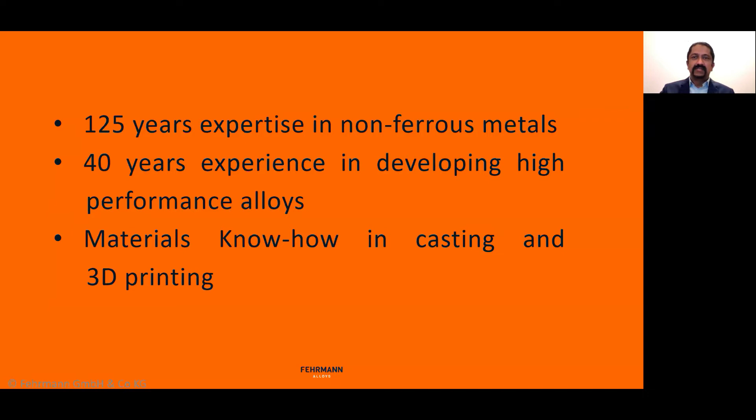So we have over 125 years expertise in non-ferrous metals, especially in aluminum, and over 40 years of experience in developing high performance alloys. Materials know-how is really our forte in casting, and we are venturing into 3D printing in the last few years. We think through this material innovation, through R&D, these will be the fundamentals for a key driver of change.

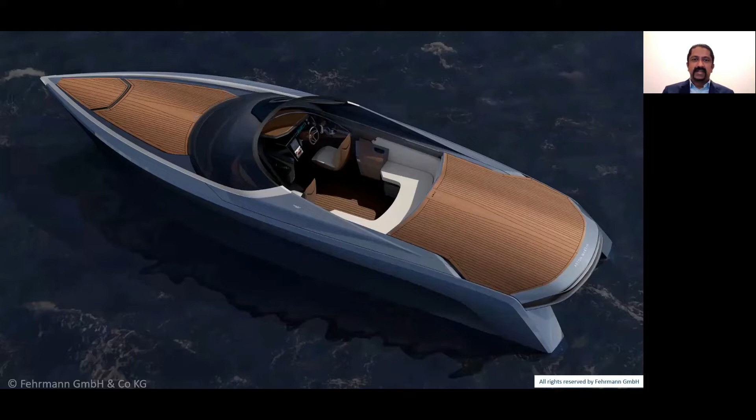For us, the building block of our products lies in our DNA, material composition and characterization. As you can see, traditionally we have been in the windows business for ships, and moving on also for building and construction. That's what we've also embarked on. And simulation techniques and technology are also coming into play to see how we can better innovate our traditional businesses in windows, where we had been very active.

We still are in mega yacht windows, ship windows, high performance ship windows, and also speedboat windows. And from there, through that knowledge in casting that we have built over generations, with over 40 years of experience in developing these high performance alloys, we have gone into looking for alloys that are also fit for both additive manufacturing and casting, safety parts. Customized development of aluminum for AM is one of our key areas that we've been looking at.

These core principles that our founding fathers had set for us in terms of innovation are at the center of our service, and we continue to strive for excellence through this. Our latest offering is really tagged as one design, one material, 1 to 1,000,000 parts. So that's what we intend to offer.

How are we doing this today? It's really thanks to some of our wonderful partners that we have in material science, additive manufacturing, and casting. We have a lot of great researchers working within the Hamburg metropole region, as well as the greater parts of Germany. We are also beginning collaboration with international research institutions to move up the value chain and to find new possibilities that will not only help us in our core business, but also help the greater industry as well.

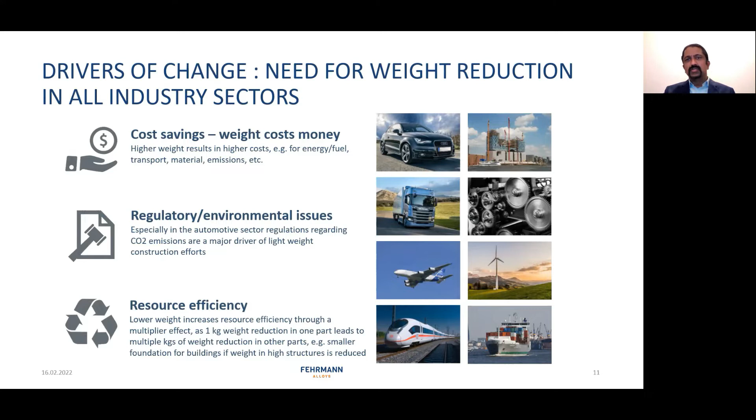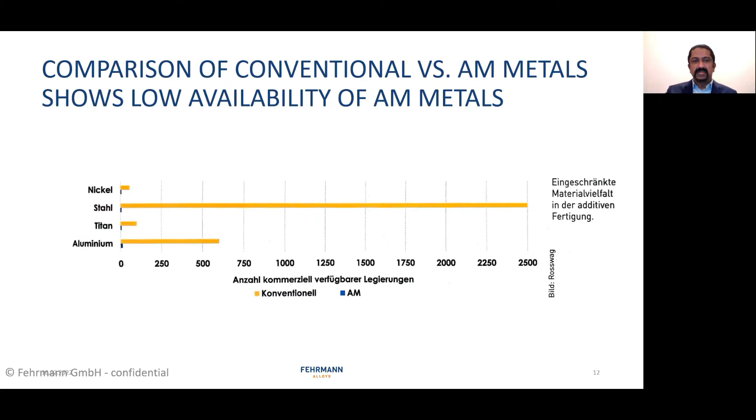Today we see there is still a lack of availability of metals for AM, and this is a niche space that we think could be very useful for us to go into, as we transform our traditional casting foundry. As you can see, nickel, titanium, and aluminium are much less available versus steel, for example, and that's an area we have been looking at.

To bring all of this together and develop high performance aluminum alloys really requires great know-how of the complete value chain. Materials are the key starting point in this: what are the alloy components, the concentrations, and the effects of the reciprocal effects as well. And how do you do the alloying?

What is the process? What is the melting process? Refining these materials to optimize them in a process chain, and then creating that alloy, which can then be atomized through different techniques, finding the right parameters, finding the right grain sizes and allocation, and characterizing the powder is very key as well.

And then eventually, what does it go into in terms of production? Is it LM, SLM, LMD? And then finding the right building parameters, the feed rate, the energy input, hatch distance, production, and per different additive manufacturing machines are really key to ensure you have a very solid alloy that you are producing.

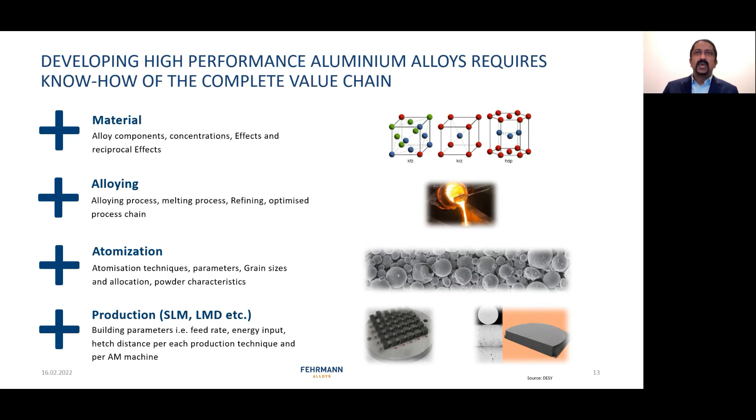Through this know-how, through this collaboration with our researchers, our in-house researchers as well as our partners, the first high-performance aluminum alloy, AlMgty 80, was launched in the autumn of 2019, making it really, for the first time, possible to produce any number of parts with one alloy through 4 different processes: 3D printing, sand casting, mold casting, and high-pressure die casting.

Following that successful launch, we introduced another silicon-free high-performance AlMgty alloy, which enables color to be added to 3D printed metal parts.

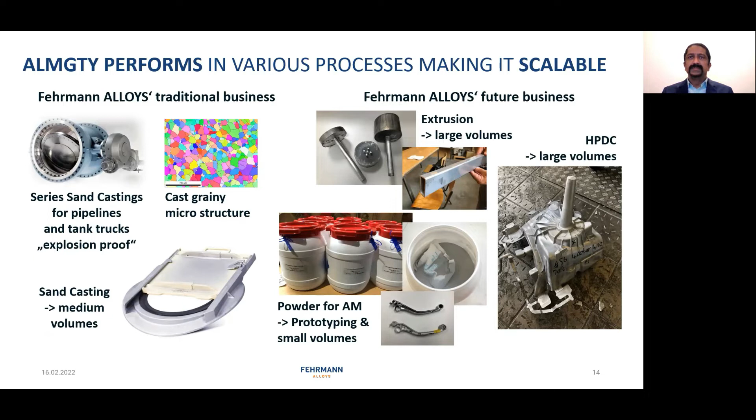As you can see from our traditional business of alloys, our future looks very much in the AM space as well, while still maintaining our traditional sand casting business. So extrusion for large volumes using our AM alloys and creating powders for AM is one of the areas we are looking into. AlMgty really is a high-performance aluminum alloy specifically engineered for 3D printing and casting.

We've tested it and qualified it with different machines. As you see, the real popular ones in the market today: SLM 280, Concept Laser, the EOS M290. These are quite heavily used industrial additive manufacturing machines, and they have been qualified to use our powders as well.

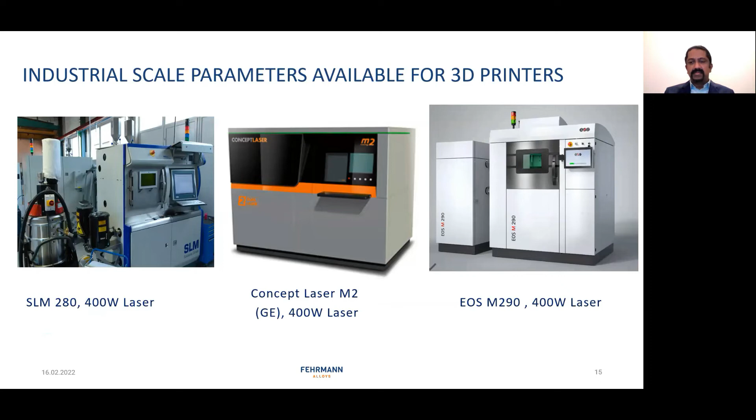But AlMgty to us is not just a material, but an alloy system that can be altered to create different mechanical properties to suit our customers' needs and requirements. These alloys can be used in selective laser melting and laser metal deposition, as I mentioned earlier, as well as in casting.

So in this case, the AlMgty HPDC shock tower, as an example, doesn't stick to the tool, and complicated geometries can be cast with the AlMgty. The target applications are structural and suspension parts in passenger cars.

Progressing in this material innovation space, in 2020 we created another high-performance aluminum alloy for the range: AlMgty 90, which exhibits increased strength and 25% higher hardness than its predecessors. At Fehrmann Alloys, we have embraced innovation, adapting to the ever-changing landscape.

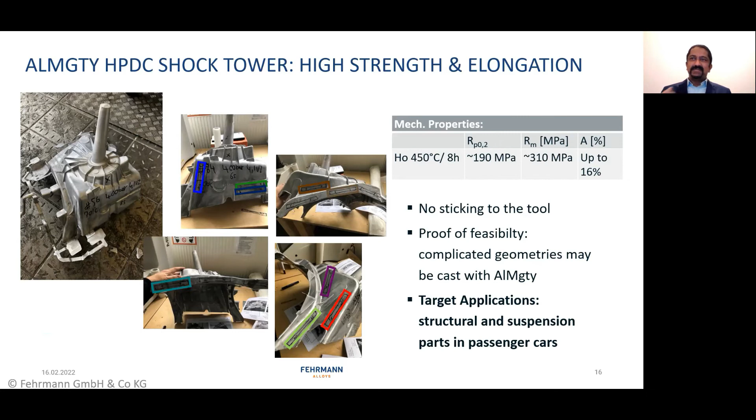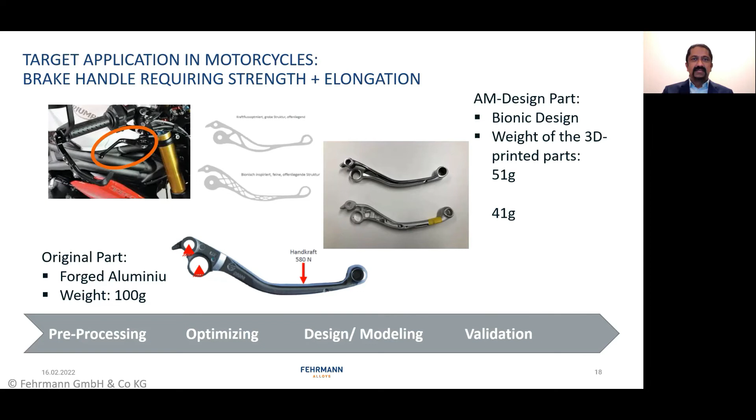These are further examples of how this can be applied to various applications in automotive, or in this case, for a brake handle requiring high strength and elongation. We are really in a unique position, and we have embarked on this journey of exploring and presenting customized solutions for customers through collaborative R&D activities.

Through this leadership and vision to create Metamaterials, as you can see, as-built AlMgty 80 can also be black anodized. This thought leadership and vision to create Metamaterials is making us into a company that makes available a range of aluminum alloys for additive manufacturing and casting as well.

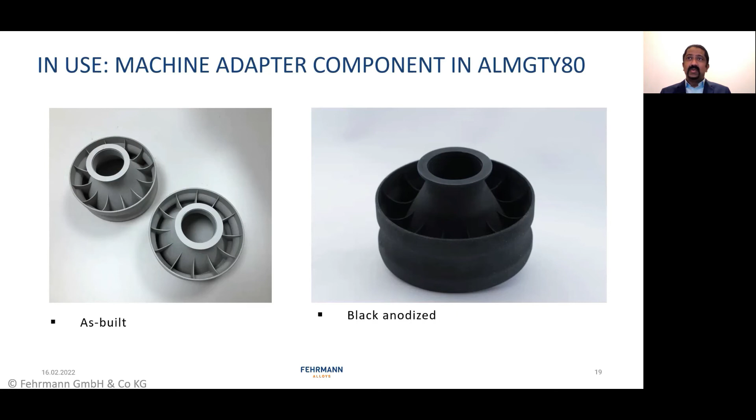With this transformation that we are seeing, we've also included 6 new aluminum alloys to our family, making Fehrmann the first company in the world to offer a range of aluminum alloys for additive manufacturing. Some examples here were formerly done in casting, but now can also be 3D printed.

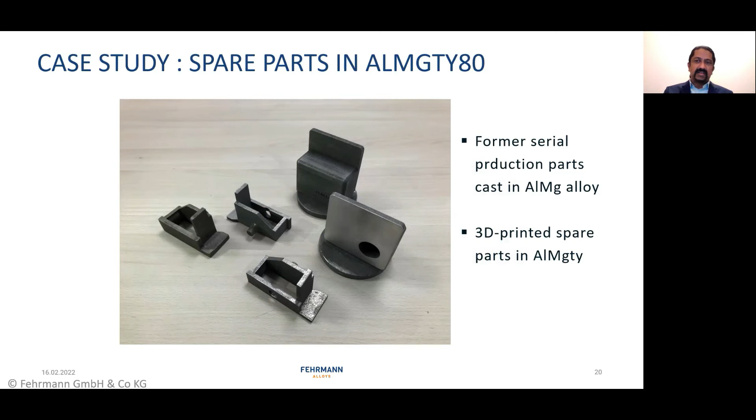With aluminum magnesium alloy, the spare parts are printed as is. This is also an example of an extrusion part in AlMgty, and a 3D printed connector in AlMgty, joined by welding and filler material. This really simplifies the whole welding process and also simplifies recycling.

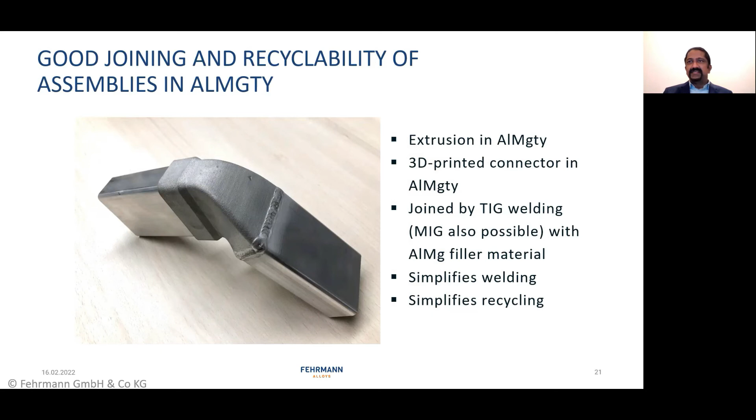With this whole succession, we've launched a whole range of AlMgty series: AlMgty 80 and 90, which are both available for printing and casting, and also AlMgty 70 and 100 with standard cast aluminum, and AlMgty 3, 5, and 50. Talk to us, we'll tell you more about it.

What really helps these stand out is that they are high performance aluminum with unique properties: strong and ductile, with a good combination of strength and high elongation at break. Their corrosion resistance gives them a very good application in maritime settings. They're anodizable, can be given color, and are scalable.

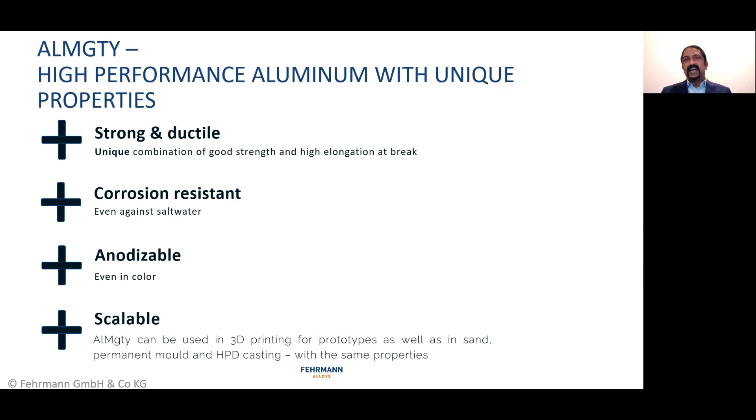AlMgty can also be used in 3D printing for prototypes as well as in sand, permanent mold, and high pressure die casting. The AlMgty 80 and 90 range is really outperforming AlSi10Mg with higher strength. It has higher elongation, and when heat treated, AlMgty is easier to process than AlSi10Mg.

Besides AlMgty, other available alloy powders from our stocks, which we are happy to talk about and distribute to you, include: aluminum alloy, stainless steel alloy, tool steel alloy, titanium, nickel, and others that we can also customize through our offering.

We source our materials from qualified sources and then quote them at attractive conditions. Quality assurance is done in-house, so you can be rest assured of that.

To meet every customer's needs, we've also increased our range of products, which now contains 7 alloys in the AlMgty family, plus the AlZinc T5. These alloys are printable, selectively polishable, and anodizable in color, adding transformational value to our already existing family.

We are actually a local foundry with a global impact, that's how we position ourselves. We are uniquely placed here in our global headquarters in Hamburg, with great connectivity on a research and industrial level. And we grow our network beyond our shores to the rest of the world, to South Asia, to Asia. We'll be happy to talk with all of you who are there today and listening to this conversation.